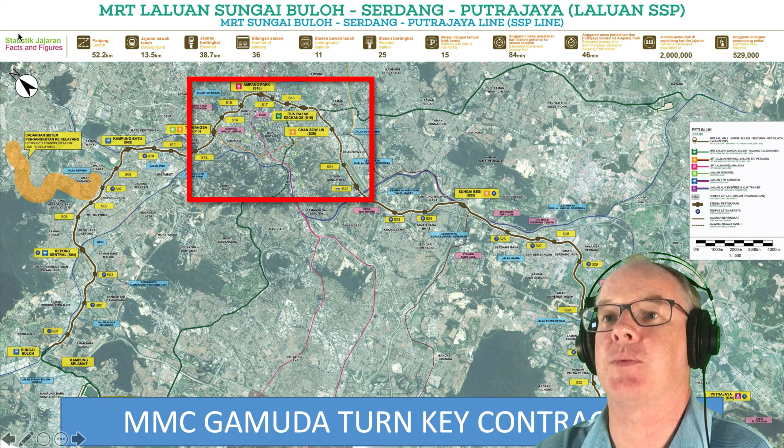And obviously, most of you recognize the landmark in the background as being the Petronas Towers, or as we call it in Malaysia, KLCC. So the project that this was started on and was the kind of instigator for using drones for Gamuda was the MRT project in Kuala Lumpur. So we call it MRT2 or the SSP line, depending on who you speak to. And I was specifically responsible for the BIM management for the underground section.

So this is a 3D photogrammetric model. So the first kind of term to be understood is this notion of photogrammetry or photogrammetric. Photogrammetry is a process where you take a standard photograph, preferably high resolution. The photograph can be captured either by drone, it can be captured by a fixed-wing aircraft, so normal flight, and it can actually be captured by handheld cameras. So there's a number of ways of capturing the photograph.

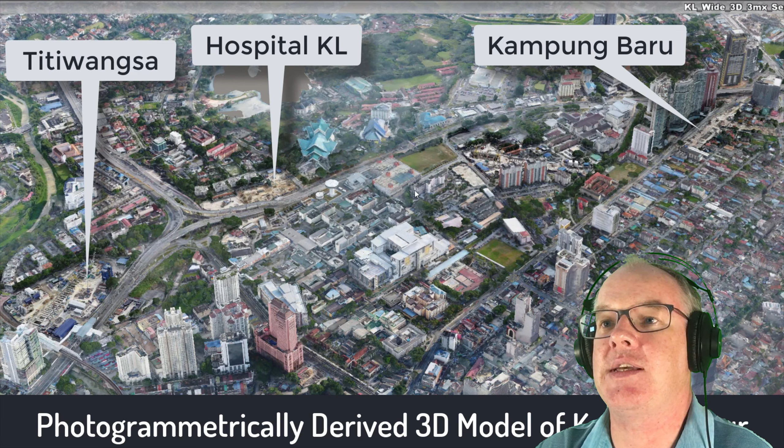So long as the photograph has got a location key to it, so long as we know where the photograph was taken, we can then use all of the photographs to create these 3D surfaces. So what you're looking at here is actually a 3D mesh of the entire KL urban environment where we're actually doing the tunnel construction. So this little video shows you a very good example of how you can build a 3D model of a city or an environment using a combination, in our case, of drone footage and aerial photography.

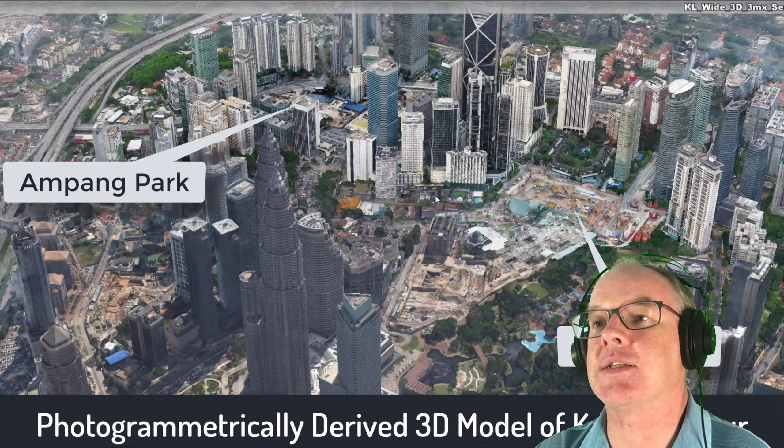So there you can see the Petronas Towers in the foreground. And the purpose of this little video is to show you the locations of all the stations in the built-up environment in Kuala Lumpur. So we have been flying around and above the stations and the surrounding areas over the period of 2 or 3 years, collecting all the photographs, collecting all the information, and building this reference model. And we also got help from one of our service providers who had done broader surveys and had the fixed-wing aircraft photography as well, which we combined together.

So this is a very good way of explaining to the public, to the contractors, to the engineers, to the client, where their project is in a 3D environment. So that's the whole of KL. So let me give you some examples of how we actually generate these 3D surface models. And in our case, we're using a software called Context Capture, which is a tool available from Bentley.

The Context Capture software can absorb and use photographs. It can absorb LiDAR information. It can take in terrestrial laser scanners. It can take in handheld photographs. And it then runs the photogrammetry algorithms to generate the 3D meshes. So when we talk about photo capture or photogrammetry, essentially, we fly the drone over the construction site, typically 80 to 100 meters above the construction site level, and we take overlapping photographs.

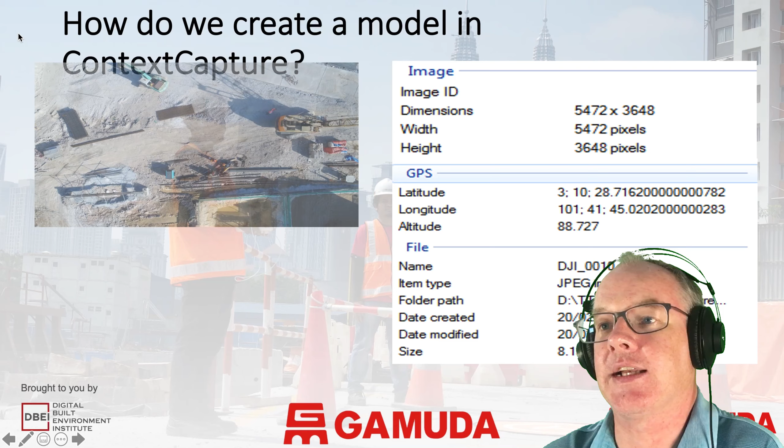Now, the overlapping photographs is critical. So you need to make sure that each image is 70% of the previous image. So you can see here as I progress through this sequence of images, it's continuously overlapping the images. And the reason for this is that the software is looking for particular pixels or particular aspects, and it needs them in 3 or 4 or 5 positions to create an accurate 3D position of where it is. So this is why we do these overlapping photographs.

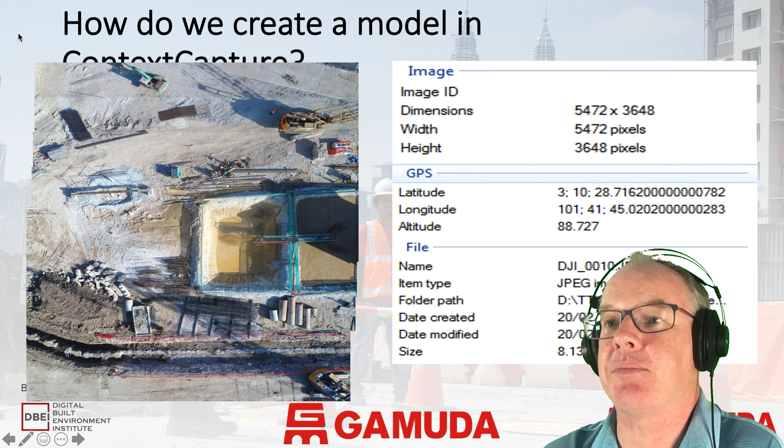You can see from the image data that these are very large files. These examples are actually from 2017, so this shows you how long we've been doing this. So you can see they're 5,000 pixels by 3,500 pixels, so very high resolution. And to give you an example of how high a resolution, if I zoom into one, if you see the little yellow box, that's myself and my colleague Nick Moorcock, and this is actually a set of images that we took.

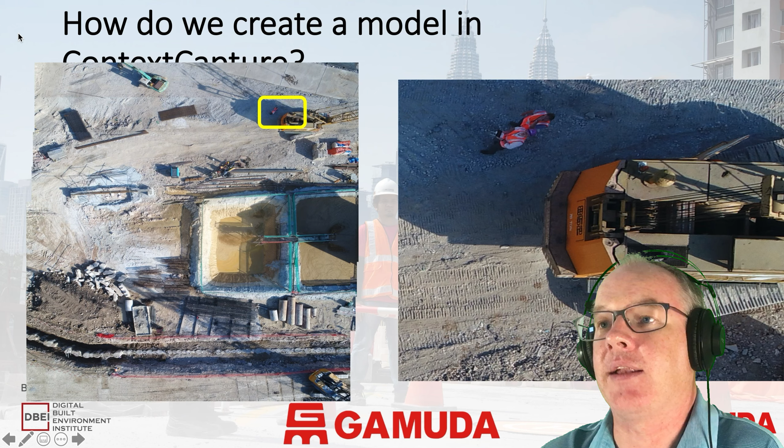I think this was the second or third trial run that we did. So this is a good example of how we actually operate. We're standing in the shade of the excavator because in Malaysia it's 35 degrees, but one of us is operating the software to operate the drone, and the other person is actually operating or monitoring the drone in flight.

So if you do this on your own, it's very difficult to keep an eye on the software, keep an eye on the drone, keep an eye on the construction site, keep an eye out for activities around you. So we have a policy that every operation that we do with the drones involves two people. One person operating the software and the other person is a spotter to make sure everything is safe and under control.

So this little video, if I get this to work, shows you what the software looks like on a mobile device or an iPad. So we use iPads typically for this operation. So we actually pre-plan every flight. So here you can see a simulation of a drone following a pre-planned path. So the planning of the path makes sure that we achieve the 70% overlap of the images.

So basically we make sure that we can actually fly the path and that we capture enough images for the area that we actually want to survey and create a 3D surface model from. So this would take typically 15 to 20 minutes on one battery, and we can cover quite a large area of the site. So once we've worked out for each individual site the flight paths, they're saved and they can be reused over and over again.

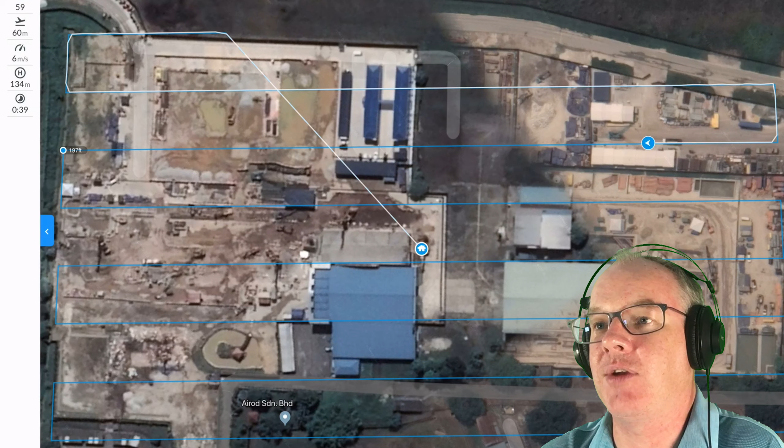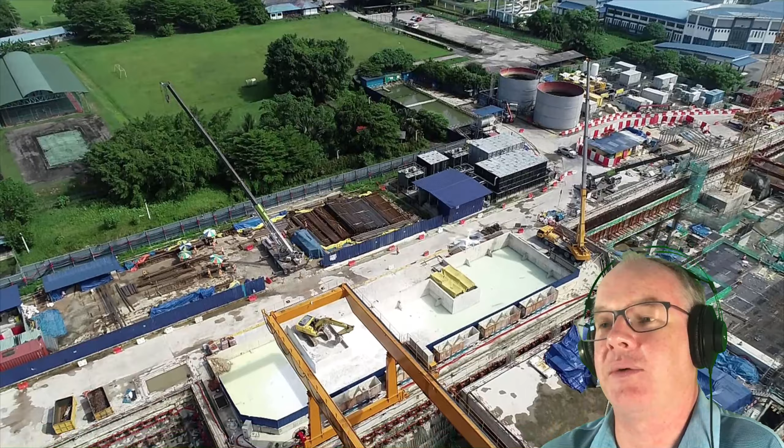Go to the next slide. So just for a bit of fun, this is actually a drone taking a video of a drone following a path. So we've been doing these kind of presentations to teach people how to do the drone. So we've been using one drone to video another drone. So here you can see a survey taking place.

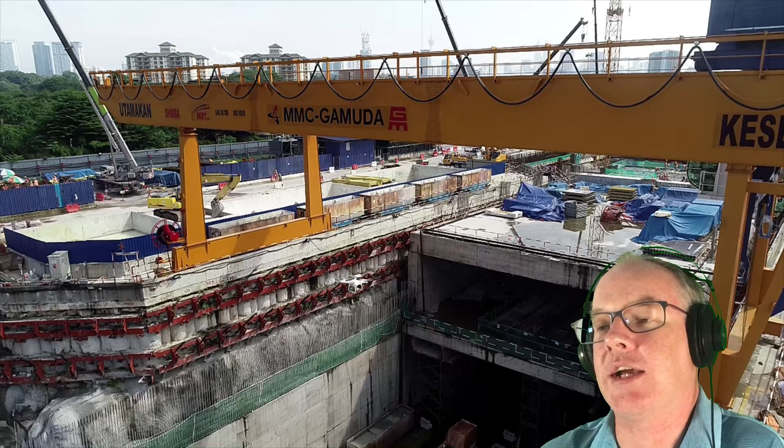And if you know how to do it, you can actually set the drones up to fly close to excavations, so you can get better information about what's beneath the ground level. This is not a radar, so it only works on visuals. But when you have these kind of open excavations, very often you need to get a bit closer to the excavation wall to get a bit more detail from the photographs to be able to build a more accurate 3D model of the excavation. So it takes a bit of practice in terms of getting the right information from the photographs, but once you've got it figured out, you can create some very detailed models.

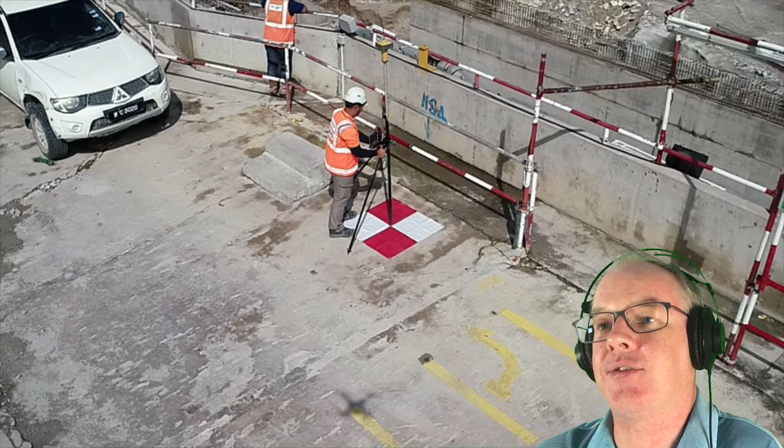Now, one thing that people don't understand or are not familiar with is this concept of ground control points. In order for the surveyors to be able to create a 3D surface model, which is actually based on the National Coordinate System, which in our case is the Cassini grid in Kuala Lumpur, you have to make sure that you can take accurate ground control points. So here you can see the surveyor is setting up a ground control point and he's measuring the GPS coordinates of that ground control point.

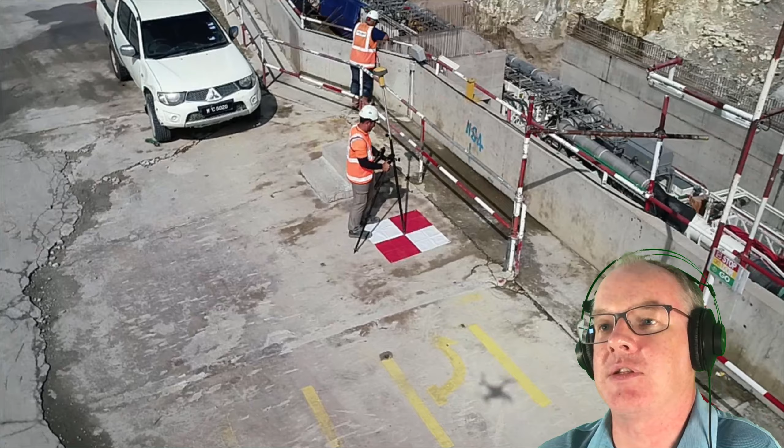And if I play the video again, you'll notice that we've got a red and white mat. So basically that red and white mat will turn up in the photographs in the ContextCapture mesh. And then we will set that ground control point as per the coordinates of this particular survey station.

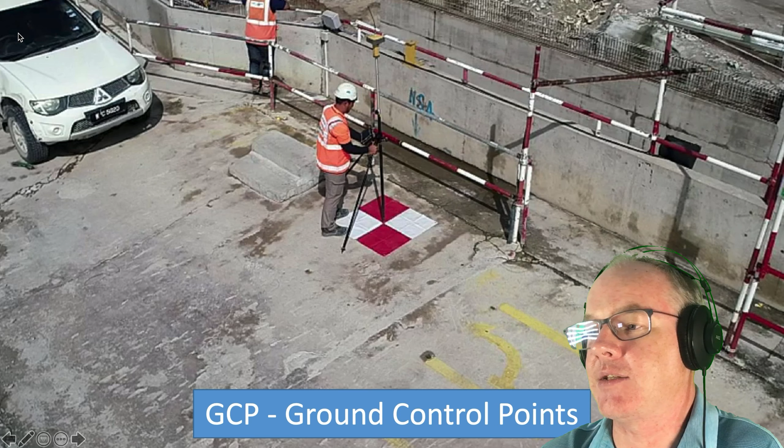So what we've learned in doing this is that for a typical site area, you might need 5 or 6 ground control points in the photographic survey to get an accurate position of the mesh in terms of real world coordinates. If you don't use ground control points, you can position the mesh by eye, but it's not very accurate. So again, we recommend that if you're doing surveys with drones to create these meshes to be able to use them for other purposes, you need to have ground control points.

So the key issue working in Malaysia, and I think this is true for most countries, is that you actually have to put a lot of effort into the planning and operation of the drones. It's not simply a case of charging it, getting in your car and going to site and flying the thing. That's actually not a very clever way of doing it. So the more planning and the more preparation you put in, the more successful your drone operations are going to be.

So before we do any flights, we have a pre-flight discussion or meeting and we say, why are we flying the drone? What's the purpose? Are we doing it to survey something? Are we doing it to record something? Are we doing it to create a mesh? We have an objective in mind as to why we're operating the drone.

And then once we understand what we're doing and once we understand where we're going to be flying, in Malaysia we then have to get 2 permits. One is from JUPEM and one is from CAM. JUPEM is a survey permit. There's a law in Malaysia that prohibits the use of aerial drones, helicopters and planes for photography without permission. So we have to get permission to fly the drone and capture photographs.

And CAM is the airport authority. So we basically have to notify the air traffic control team that we're operating a drone in the airspace in and around Kuala Lumpur or wherever we're operating. So we have to notify 2 authorities and we need to make sure we've got the right certificates in place to do that. We then make sure that every flight operation involves 2 people, a pilot and a spotter.

So we then have a system for logging all those flights. So it's worth remembering that the photographs may be taken for one purpose on one day, but by keeping a record of those photographs and by keeping a record of the model, we can actually use those photographs in the future for potentially other uses. So future projects, future developments, or going back and doing comparisons.

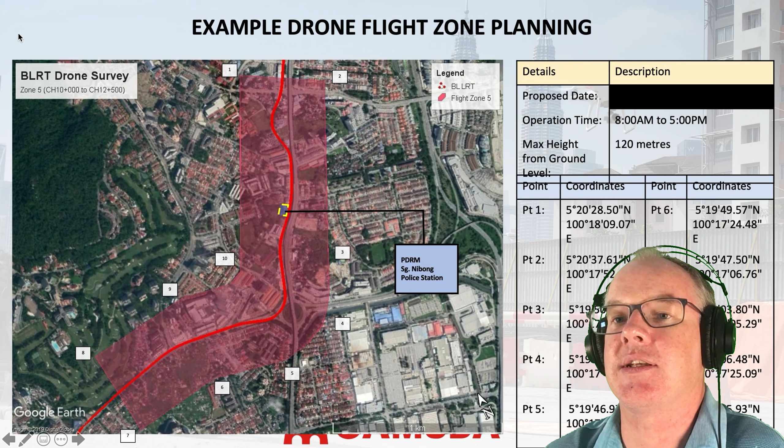He's standing local to the drone operator and he's keeping an eye on the position of the drone. He's keeping an eye on surrounding activities. He's making sure that the drone's not going to crash into a crane or anything else. And if there are any incidents, he will instruct the pilot to bring the drone back to the safe landing spot immediately. So again, all part of a safe policy that we operate these drones as safely and as smartly as we possibly can.

So an orthophoto is generated automatically by the software based on the 3D model and the photographs that are taken. So you can generate a true orthographic image of any site by flying the drones and using the ContextCapture software to create the orthographic photo. It is dimensionally accurate and it is a true orthogonal image. So you will not see the slope in the walls. You will see basically the verticality of the elements, and it is a true two-dimensional image.

So you can bring this into CAD, you can bring this into Revit, you can bring this into Navisworks, you can use it for backgrounds. It's very useful 2D information. And this is the Chan Sow Lin image. And what we've been doing is we've actually been taking these images and using them in GIS. These are more accurate than the available information on most GIS platforms. So this gives us a much more accurate representation of the construction site at a given point in time. So we prefer to use these orthophotographs in the GIS.

So they can actually be correlated with cadastral maps, they can be correlated with proper street maps, survey maps, and we can map out the TBM with great accuracy in terms of its projected path and actually its final path as it passes underneath particular properties or particular road crossings, etc. So using these orthophotographs is a very good way of being able to combine different sets of information.

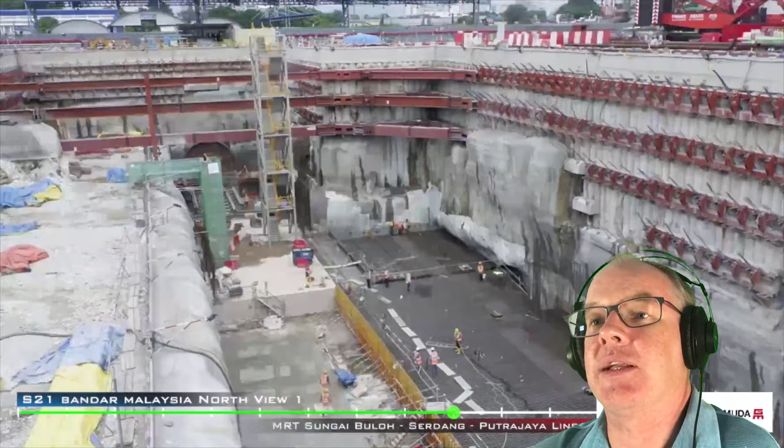Now I'm going to show you something a little bit unique in terms of what we've been doing with some of these meshes. So this is a traditional time lapse of a construction project. So this is the TBM launches for that same section of tunnels from Bandar Malaysia to Chan Sow Lin. That's from a fixed camera position. So we cannot use those images to build 3D models. It's just physically impossible. We would need hundreds of cameras to be able to do that.

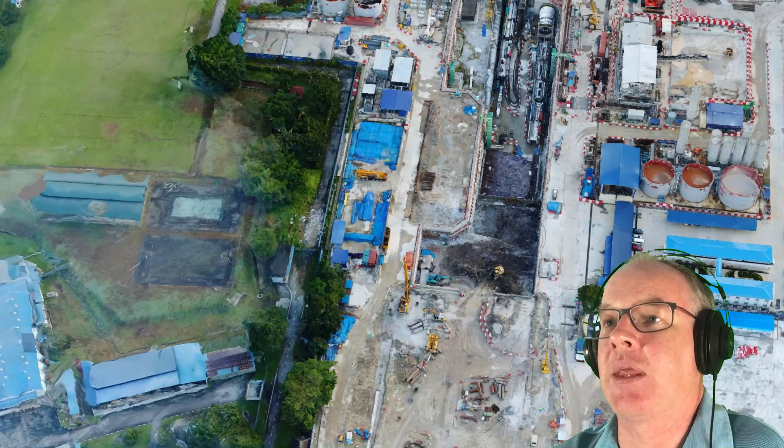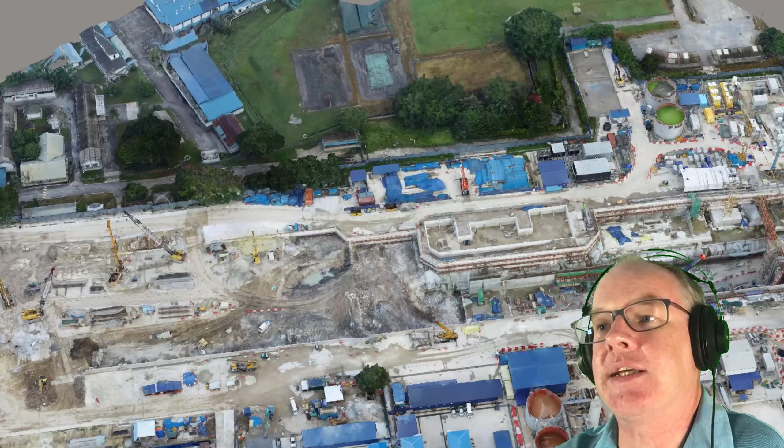So what we've done instead is we've flown over the site on a 2-week or 3-week interval, and then we've created a 3D mesh for each period of time. So every time we've done a survey, we've created a mesh of that point in time. And what's happening here is that using the actual photogrammetry software, I've created this kind of orbiting time lapse, but it's actually a 3D mesh. So I can actually look at the sequence of construction across the site in 3D.

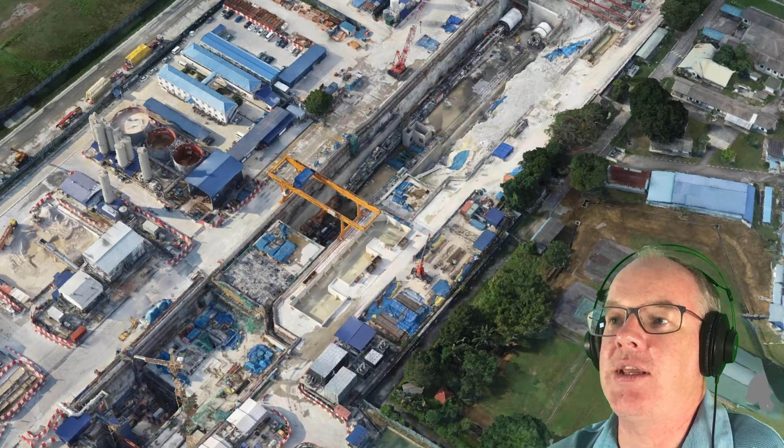So I can compare this month's progress to the previous month's progress. I can compare the amount of material on site this time to the amount of material on site last time. And in terms of a wow factor for presenting to clients, because it's a 3D mesh, we can zoom into certain areas, we can look at them from different angles, and we can go through the cycle. So this is basically a time-lapse 3D survey of the construction site. And as it gets to the end, you can see that the TBMs are actually in position for the second launch to go south into Bandar Malaysia South and onto the actual portal.

And if I show you the actual mesh, this is the mesh that's created from the photogrammetry process. So it's not perfect, it's not ideal, but it is reasonably accurate for our purposes, and it's reasonably accurate to within 50 millimeters. So here you can make out the position of the permanent wall, you can make out the TBM, you can make out the kind of surface mesh for the formwork, and you can kind of make out the position of the permanent wall on the other side.

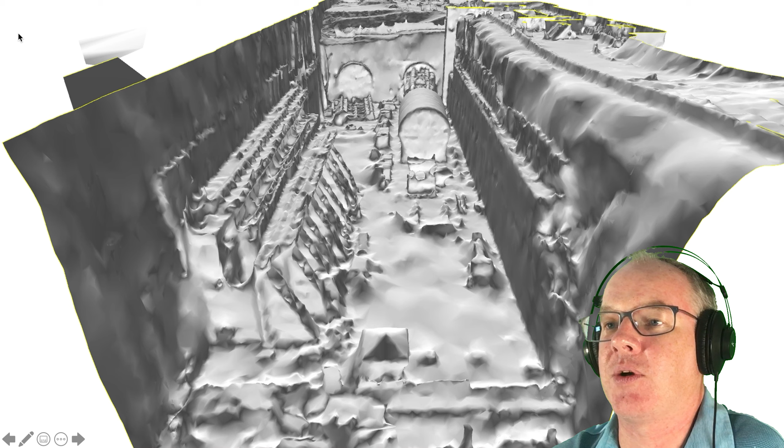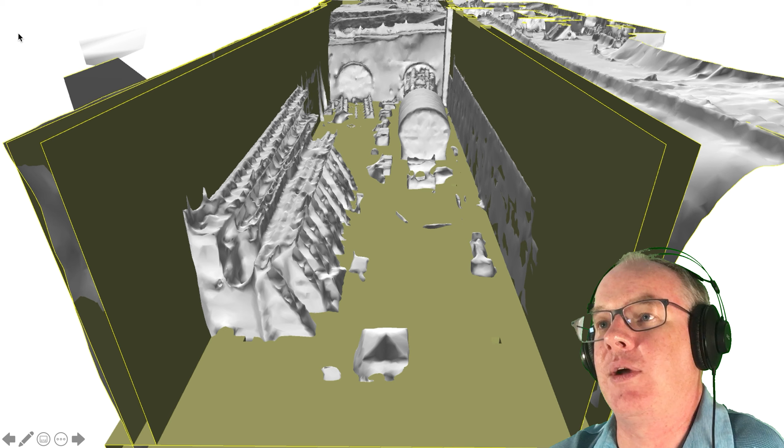So we can take these meshes, and because we've used ground control points, because we've done this accurately, we can then link this in using the actual project coordinates to the BIM system. So in this example, we've taken the surface mesh into Navisworks, and we've been able to overlay that with the actual designed permanent works. So you can see the base slab, you can see the vertical slabs for the station, and you can tell that it's not 100% perfect, but it's pretty close. It's certainly within tolerance that we've built the permanent works in the right position, which is always a good sign. So it is possible to link the building information models with the survey meshes and make use of them.

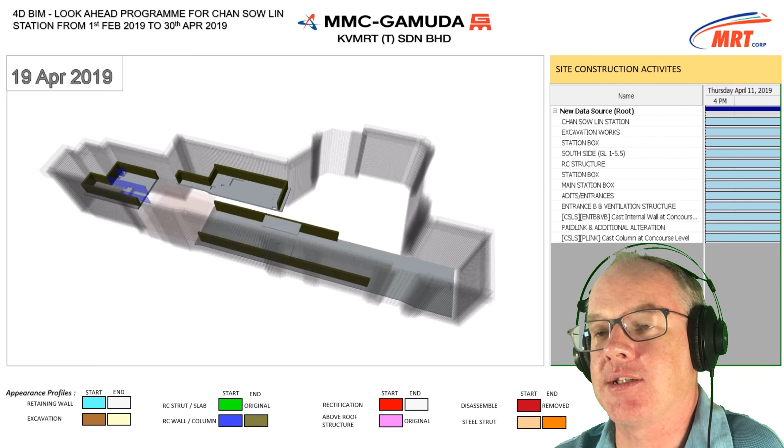So just to show you another example of this, this is a 4D sequence that was done in Navisworks Timeliner to show the construction sequence for the same station. So this is the slab pour sequence for Chan Sow Lin Station. And just to show you an example, we do all these stations with 4D. We model out all the stations in 4D. But what we also discovered is we can actually use the same time-lapse basic concept with these models.

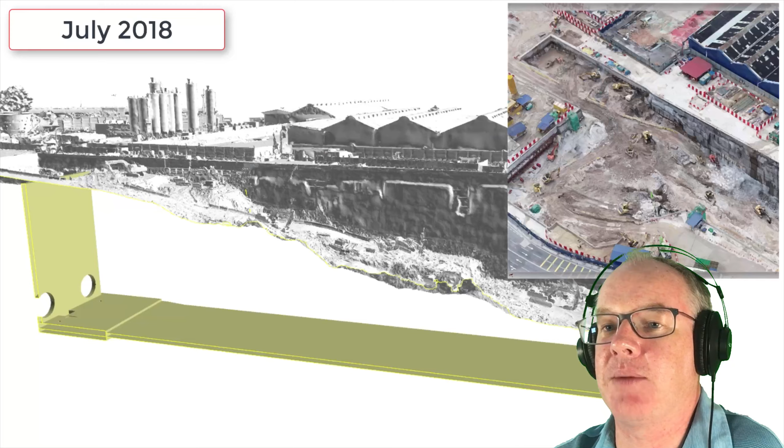Here's what it looks like when you do this using a combination of photogrammetry and BIM. So we have a 3D mesh of that site excavation. We can cut a section through it. So here you can see a long section to the station. We've got a reference in terms of what we're building ultimately. So that's the base slab.

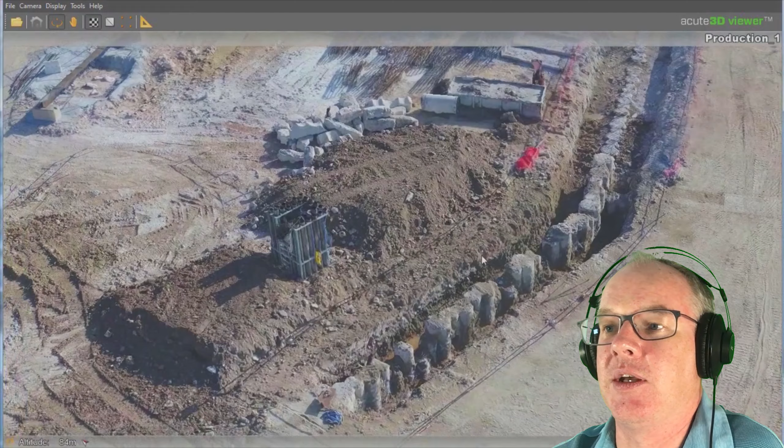So I've talked about the positioning of the mesh. The other thing about the mesh is that they're very accurate. So we can use the mesh for measuring distance. So you can take linear information off the mesh. And you can also use it, more importantly, for volume calculations. So in this example, get this to play.

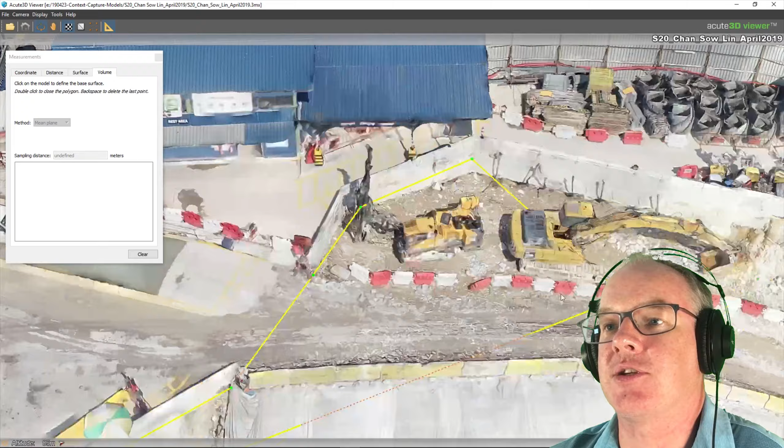So what we're doing here, this is me just basically doing a demonstration, but essentially we're using the ContextCapture tools, and you can map out a boundary that you want to measure the volume for the mesh. So what we're doing here is basically tagging the corners of the excavation, and what we're trying to do is work out, in theory, if we wanted to build a platform at a certain level, how much material would we need to excavate and how much material would we need to fill to create that platform.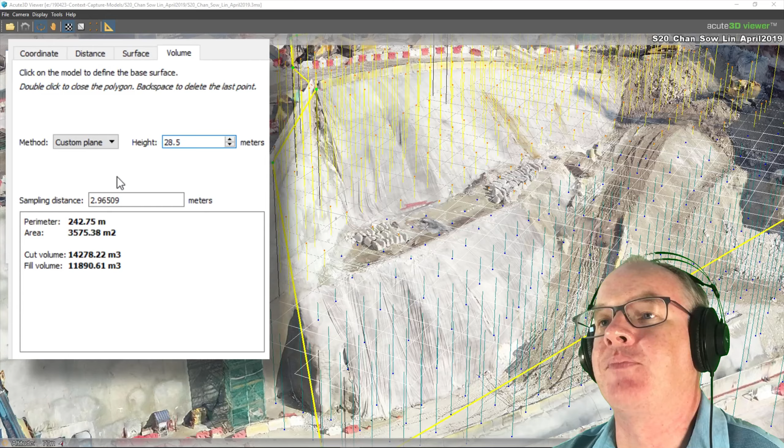So I've created the boundary, and then I use the mesh and I set it to a certain sampling distance, so in this case 3/4 of a meter, and it then tells me from the mesh how many meters are above and below, and it tells me that I need a certain amount of fill and a certain amount of cut. So the cut is in yellow and the fill is in green.

So we've only spent an hour on site with the drones, but now we can actually do a very detailed volume calculation. And while it's not millimeter accurate, it is accurate to certainly within half a meter in terms of the density or the volume. So it's accurate enough for the purpose of us doing quick surveys and quick measurements. So we can use the mesh to quantify material on site. We can use the mesh to quantify spoil. We can use the mesh to quantify excavation complete. And we can even use the mesh to generate drawings.

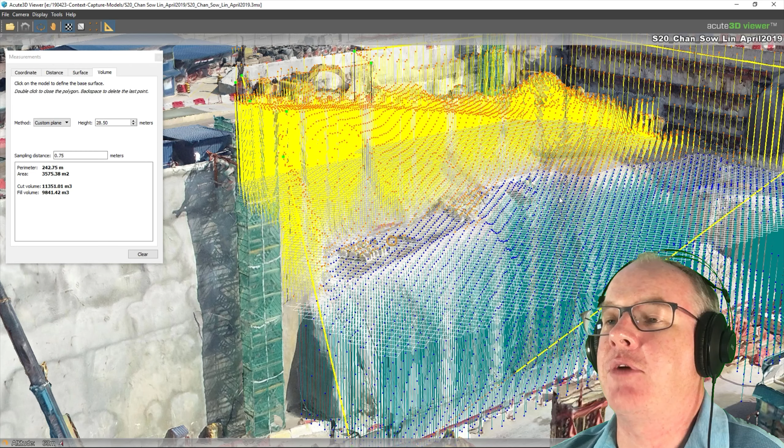So I'm going to show you another example, and this is a highway project, so we're constructing a highway. So we've flown along the alignment of the highway, and we've, in this case, taken the orthophotograph, overlaid it on the actual CAD file showing where the actual plan is for the construction of the highway. And we've been using the drones to monitor the site fill and the site excavation. So typically, you will get these kind of record drawings which the surveyors produce, but they do that by going out with total stations and staffs and spending hours and hours over days and days collecting the same information.

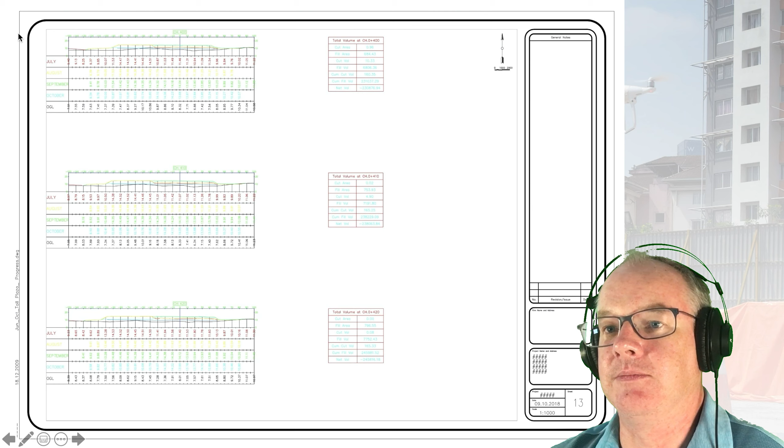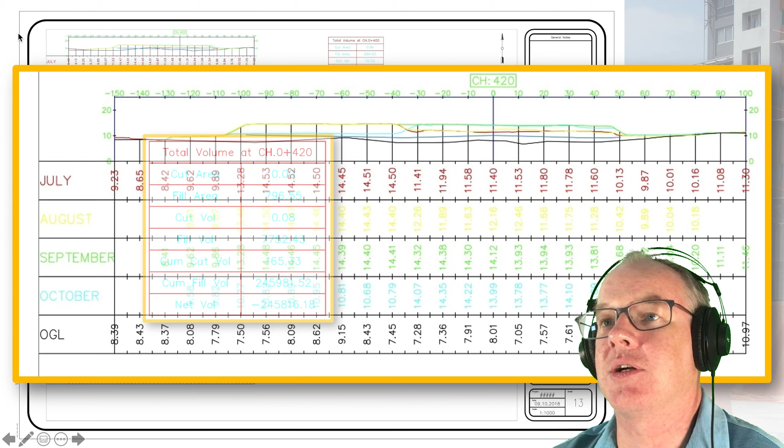We're able to do this directly from the mesh. So we can actually go out and survey the site over a matter of hours, convert the photographs into a mesh, and then convert that mesh into a CAD file, and then we can cut that CAD file. So we can actually measure out with great accuracy the cut volumes, the fill volumes, the cumulative volumes, and ultimately the net volumes. And we can do that very quickly.

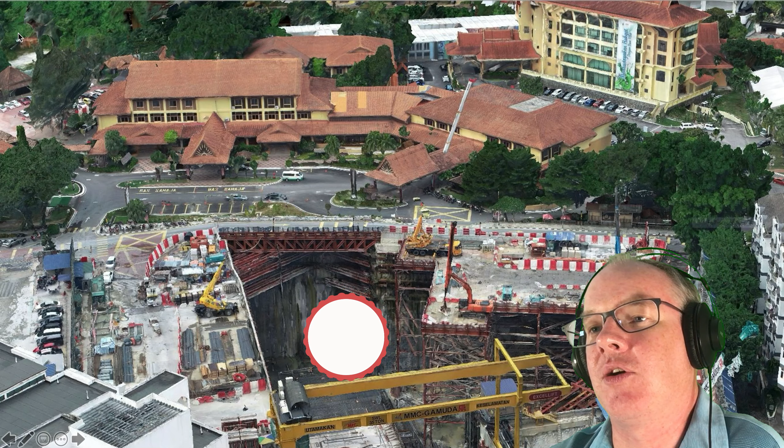Another example is surveying for the purpose of confirming as-built information, or in this case, confirming that the as-built information is not correct. So here you can see an excavation at one of the stations in the middle of the city. You can see in the middle of the image a concrete wall, and this is actually a TBM launch location. So we're going to set up a TBM, we're going to drive it out through that wall, and we're going to drive underneath this old building.

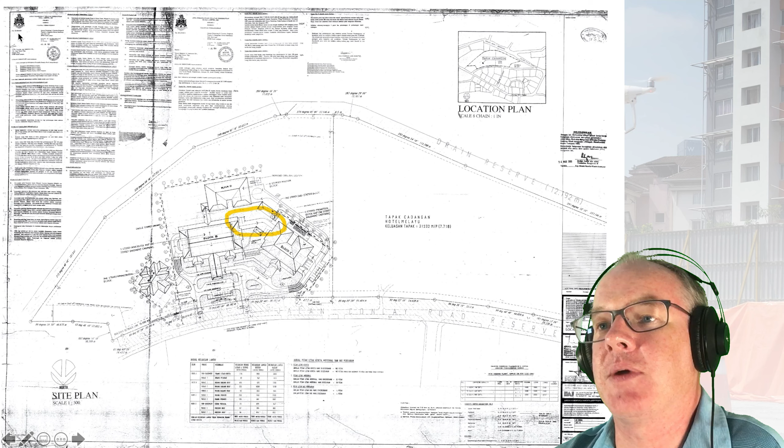And we were given a set of plans, but the plans didn't tally with what we were seeing on site. So we wanted to survey this building, so we used the drones to survey the building. We had a set of as-built drawings, but we knew they weren't correct. And we were particularly concerned about one area where on the drawings there was no major structure, but the building was obviously much bigger and much more substantial. So we took the drones, we surveyed the site. You can see the site is in the bottom corner. You can see the building of interest is in the top.

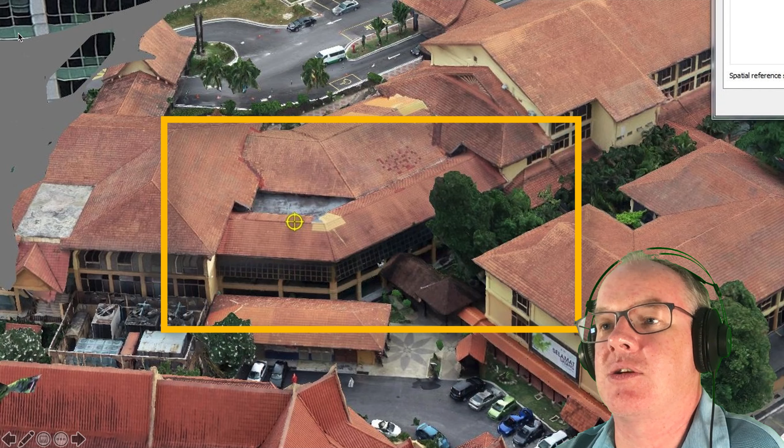And then what we did was basically zoomed into the area of concern, and we identified that this structure was not on the record plans. And then we were able to use the drone survey model and these images to actually build out a structural model that we were able to use for settlement analysis and risk assessments. So we were able to mock up basically what we thought the structure was, and this structure is actually over the top of the tunnel excavation. So this is part of our risk assessment, risk modeling exercise.

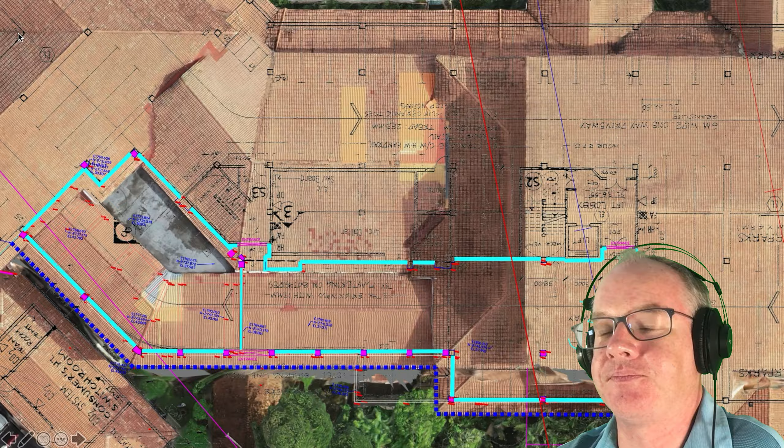So we use the drones as a survey tool rather than clambering around the building and trying to get access to roofs and everything else. So it allows us to do these kind of surveys. So that's how we're using the drones to create tools for BIM and for 3D modeling.

What we also wanted to do was make this information available to the entire project team. So on the project, we're using ArcGIS as a platform for delivering geographical information. So that could be map information, tunneling information, borehole logs, etc. One of our team, Tony Joseph, is a GIS specialist, and he was able to work out a process where we could convert the mesh that comes from the drone into a web-based delivery across the GIS platform. So you could use GIS to access the information. So let me show you how that works.

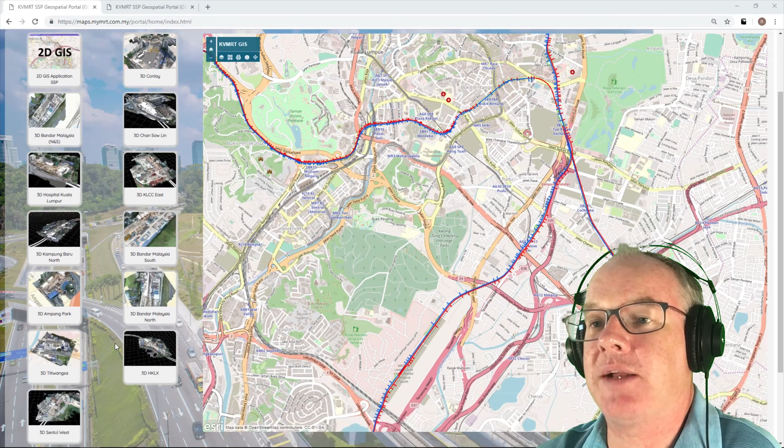So this is the ArcGIS platform. This is a web-based platform, so you just access this through a browser. You don't need any particular software. And this is the 3D mesh. This is again Chan Sow Lin station. And this is the mesh. You can see it loading up in the background. And we have also input the Revit mesh. So we've got a mesh from Revit for the structure, and we've got the photogrammetry mesh.

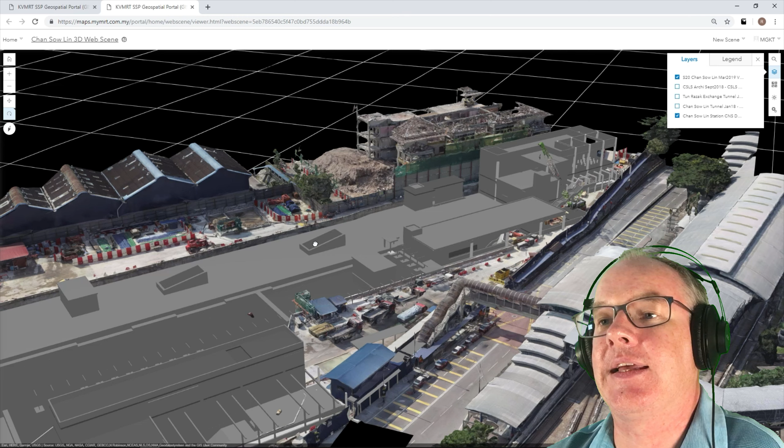So if you have access to the GIS platform, you can go to any of the construction sites. You can open up and look at the current or the latest survey information and the latest BIM or digital engineering information, and you can overlay the two together in this GIS environment. So you can actually start to study what progress has been made on site and what work is left to be completed. And this has been a very powerful tool because the project is so large, it's physically impossible to visit all the sites on a regular basis.

But it is actually very beneficial for people to be able to look at these models. And the other thing that's important to recognize is that a lot of the design teams are not all based in Malaysia. So we have designers that are operating in Singapore, they're operating in Hong Kong, they've got staff working in the Philippines, in India, in Taiwan.

By giving them these surface models, it gives them the chance to review what's happening on site and identify any particular issues or particular concerns, and make sure that the team are all aligned. So making this information available online is actually very, very beneficial.

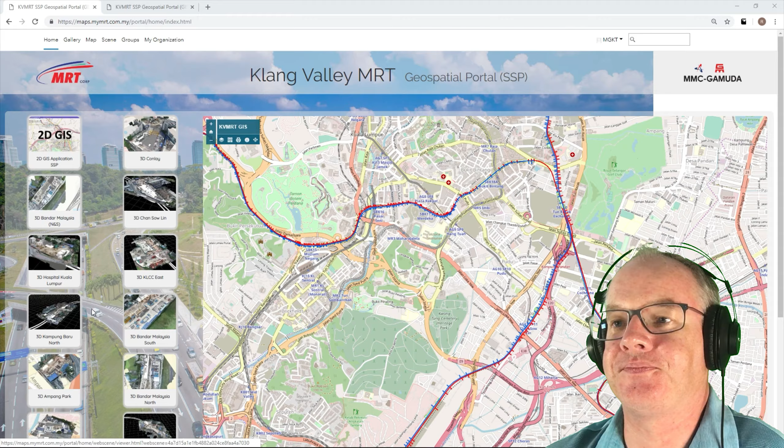And then just for a bit of fun, when we were doing the tunneling activities, this is actually a video that I captured from our Facebook feed. So we used a drone and we actually ran a video. And this is the TBM, this is the first TBM breakthrough. So this is the actual first TBM drive breakthrough.

We've been working on this project for 4 years. And while this goes back to kind of late 2018, it was a great successful milestone for the company to actually make sure that we deliver the first tunnel successfully. But to see that image captured by drone and to see the drone feeding the video directly to social media channels that the public can watch was unique.

So for those of you who don't know, if you have a DJI drone, you can make them web enabled and you can live stream the video from them. And we don't recommend it on a regular basis, but in terms of showing unique opportunities or showcasing unique stages in a construction project, it is something that's good fun to do.

So as we get towards the end, and hopefully there's going to be a few questions about this process, I just want to give you a couple of examples of how we see this going forward. So we've learned how to use the drones to capture the meshes. We've learned how to use them to interact with models, how to put it on GIS, and we've used them for things like safety reviews, quantification, etc.

We're still understanding what we can do. So now we've mapped out what we can do with future projects. So we understand that the drones give us a much better level of inspection. So in theory, if we flew the drone on a daily basis, we'd have probably very, very powerful records of the site at every stage. We don't think that's necessary, but if we do fly every week, we'll have a very good record of the progress of site over a long period of time.

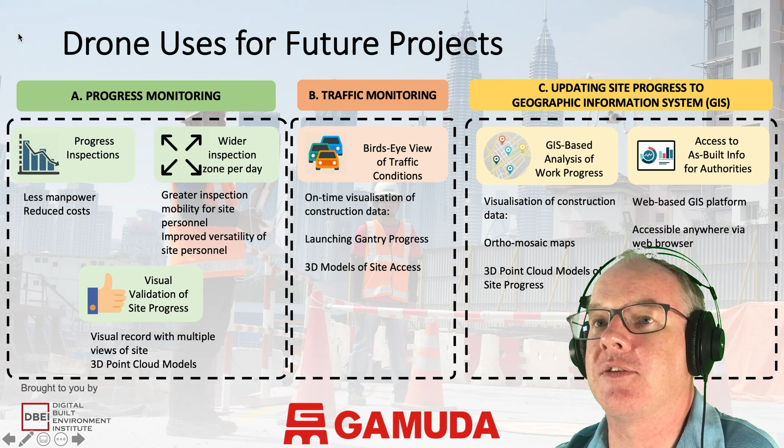The important thing is that we're committed to training people, and particularly our surveying team and our engineering team. So we've trained now over 30 people. They're now certified drone pilots and spotters. You can see how accurate the information is and how quickly it's done. In terms of surveying, we're seeing productivity gains of the magnitude of 30 to 50x.

And the reason we're seeing that is that the amount of data that can be derived from an image and the amount of information in terms of distances, volumes, the ability to overlay with other information, the ability to incorporate it with cadastral information, to be able to capture that much of information with a survey team would take 30 times the amount of effort. So drones have completely transformed our ability to capture information.

They don't completely replace surveyors because we can't use them for setting out. We can't use them for specific tasks when it comes to construction. But in terms of recording and actually doing general survey, they're very, very powerful. And as I say, we're continuing to find innovative ways to use drones. And hopefully in the Q&A, we'll find out how other people have used drones in their business if they've been using them so far.

So that's the end of the presentation. And I think we'll hand over and do a Q&A.